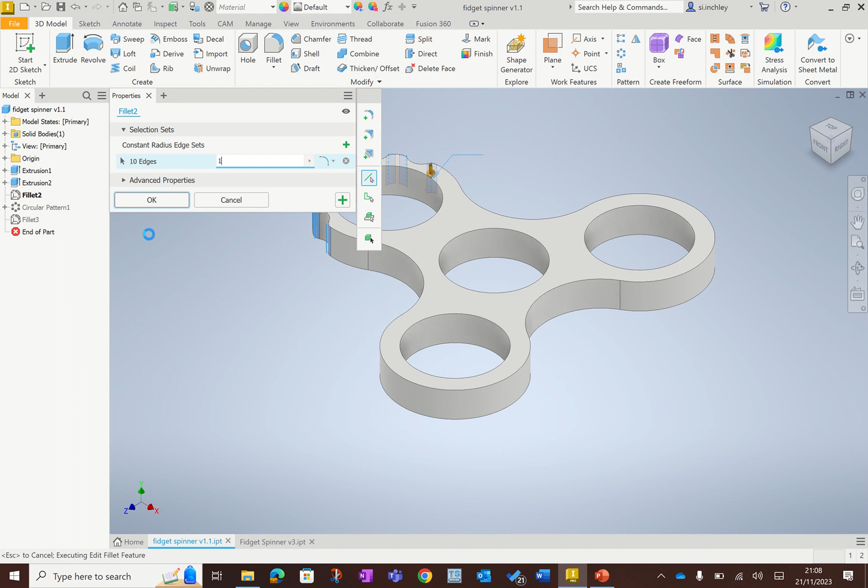Okay, now that you've got your fidget spinner kind of done, I actually decided I don't like this quite so rounded, so I'm going to come back up and double click on my fillets here, and change it from 2 millimeters to 1 millimeter. That makes that fillet slightly less on these inner parts, and then I'm going to double click on this fillet as well and change the top fillet to 1 as well.

That feels a bit more robust to me. Now I'm going to create a shape on the top here. So first, start a 2D sketch, and put it on the top.

Okay, now I want to take and use these circles that have previously been drawn. So I'm going to project the geometry of the previous circle onto this sketch by clicking on that circle and clicking on that circle.

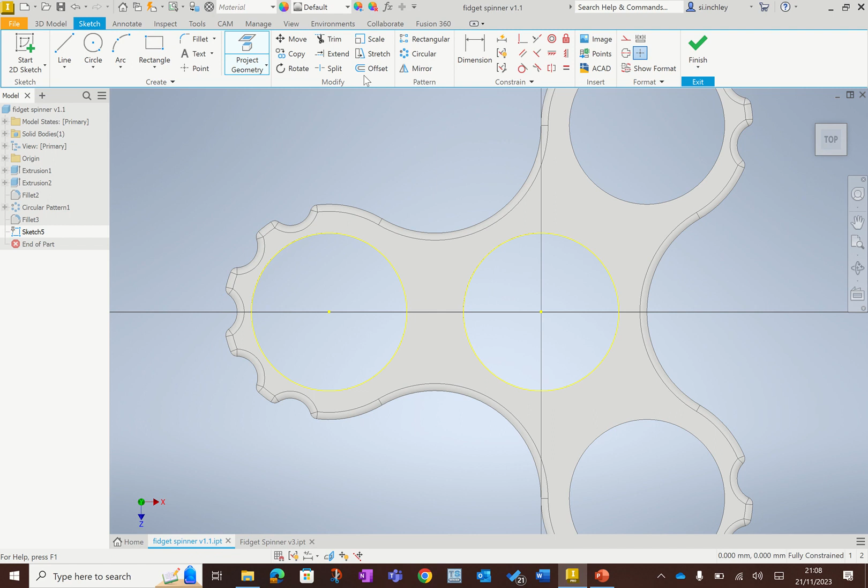Next, I want to offset this circle by clicking the offset button, coming over to this circle and just coming out and tapping in 2 before clicking again, and that's now drawn a kind of offset. That's as close as I want to get to that circle with cutting some things out.

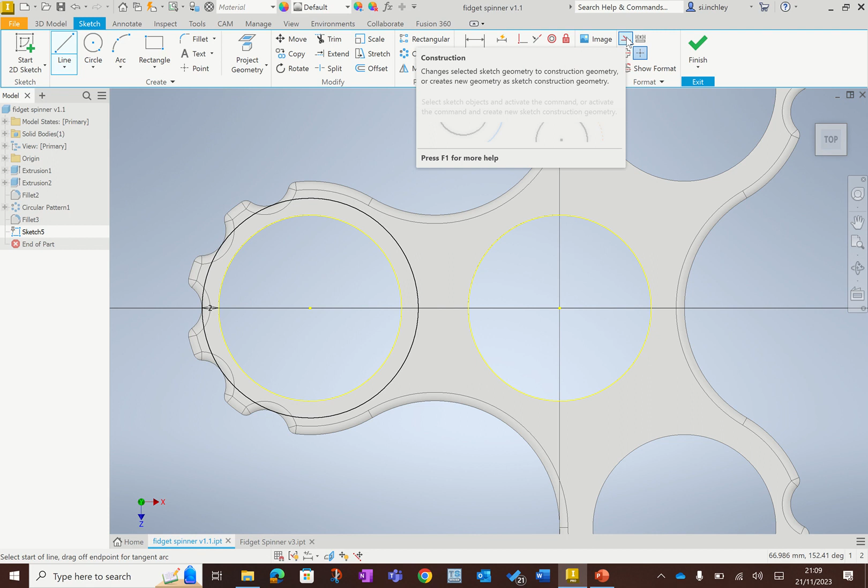So I've drawn that now, and next I want to draw myself a circle here, but before that I want you to click on the line tool and come up and click on this button called construction. Now from the center of this circle, click once and come over and draw a line to the center of this circle. That's now drawn what you can see as a dotted line.

It's still drawing lines, so I'm going to press escape to get out of the tool, and you'll see a dotted line there, which is helpful as a marker line, which you'll see why we want in a minute. Importantly, you must undo this construction button before we go any further.

That's now undone, and we can come and click on our circle tool. I want to draw a circle here from the center. Now let's say I just accidentally miss this line and click it here. You'll see how to fix that in a minute.

I'm going to come out and set that to 22 millimeters. Now I've drawn my circle. Here's the center of the original circle. I want you to come out this way.

We're going to offset that circle a little bit. So now I've come out a little bit, and we want to put that circle onto that line because we missed it. So I'm going to use this coincident constraint here, and with that highlighted, click on that central circle and then click on this line. That's shoved the circle onto that line.

I'm now going to come up and dimension between the center of that circle and the center of the original bearing circle, and click that to about 3 millimeters. Now that isn't quite enough of a scoop there for me, so I'm going to bring that up to maybe the same diameter of this circle here, which was 22 plus another 2.

So double click on that one. Oh, it's clicked the line instead. Can you see how it's clicked the line? So escape, and let's zoom in and double click on that. There we go. Let's go to 24 and see how that looks. That feels quite nice to me.

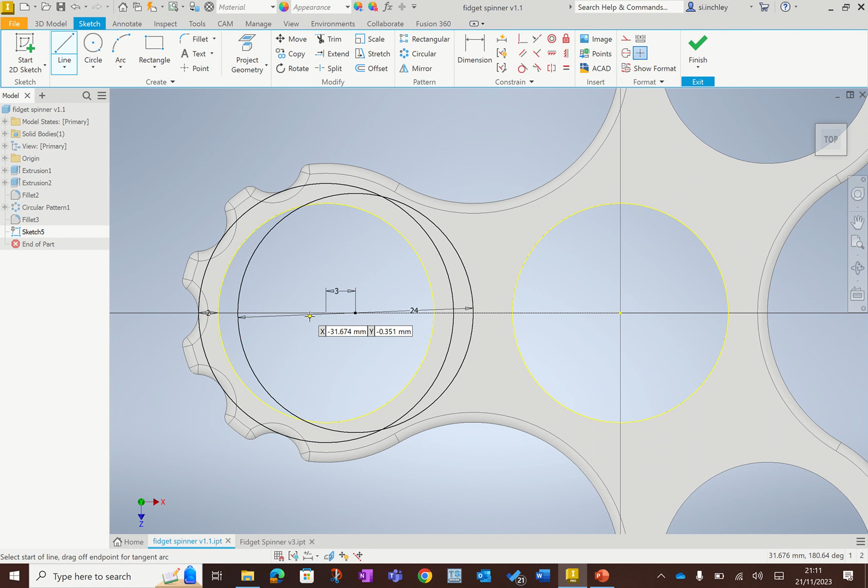Now, so we've got ourselves a kind of crescent moon shape. I'm now going to come up and click on my line tool, and let's have a little look. From the center of the bearing circle, not the one we've just drawn, but the bearing circle here, we're going to click on that line, and we're going to come up and hover over here.

Now, it's quite hard to get onto this line because it keeps snapping onto here, so just come up far enough so that you can click on that line there, and do the same thing from the center of a bearing circle to the outside of the furthest along circle, and click two lines. Now let's come off of there.

Now you can click on the dimension button, click on this line. It thinks you want to dimension it until you click on the central line as well, and it realizes you're doing angles, and you can come out here and click out here once, and let's put that at 4. Do the same with this line: click once on this line with that dimension tool highlighted, then click on the central line, then come back out to here and click once and click on 4.

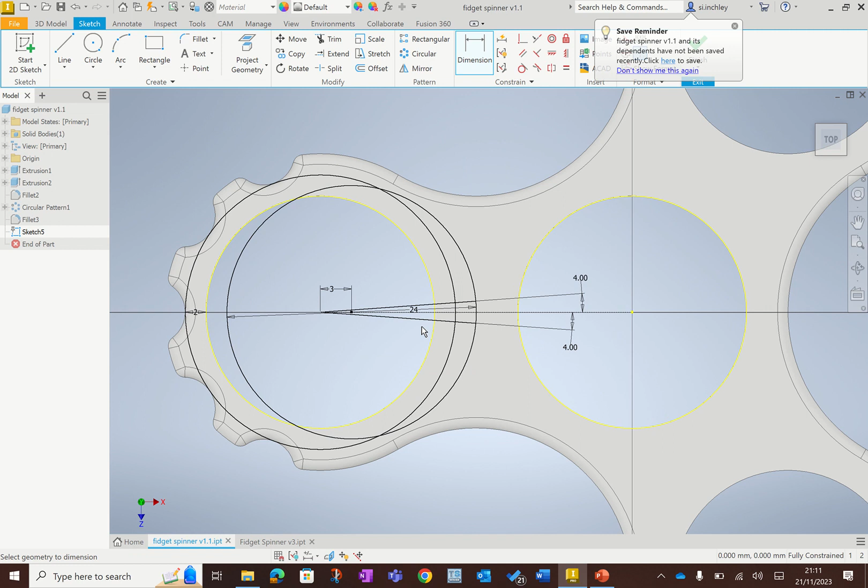That's now given me the right angle that I want to be working with. And you can now see that's why we drew that line originally, it's a marker line.

Okay, now I'm going to come up and circular pattern those two lines. So, circular pattern tool, for geometry highlighted, click on that line, come up to the axis, click on the bearing circle, change it to 8. Change the direction, it's going up at the moment, I've clicked the bottom line so I want it to be going down, so I'm going to change this button, the direction, by clicking on this button. That's now, as you can see, going down. And I'm going to change the angle not to 360, but to just 60. Okay, now you can see I've got all those lines coming down like that. I'm going to click OK.

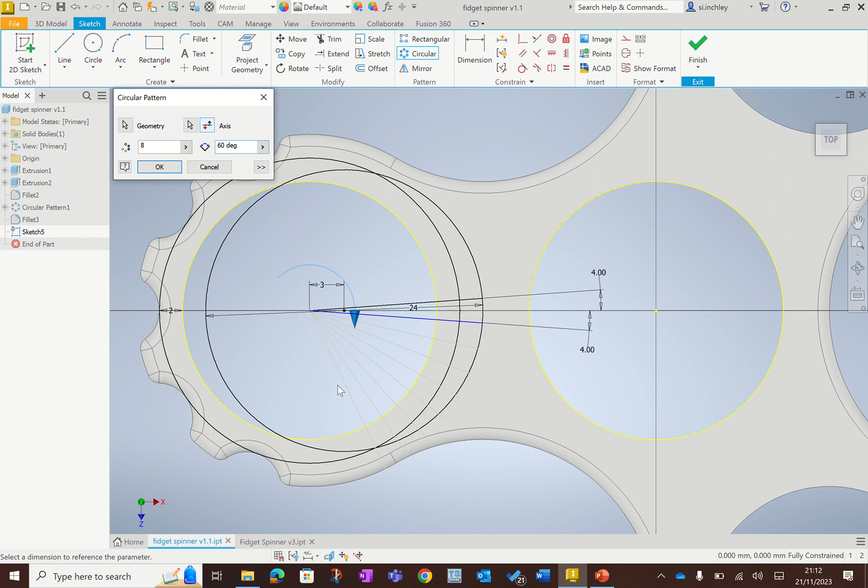I want to do the same thing going the other way, so I'm going to click once again on the circular pattern tool. I'm going to select this top line this time, like that, and then click on the axis button, select this bearing line. It does appear to be going the right direction this time, going up. I'm going to change that to 8 lines, and change the angle to 60. Okay, there we go, it's now drawn that nicely for me. You can see that kind of shape.

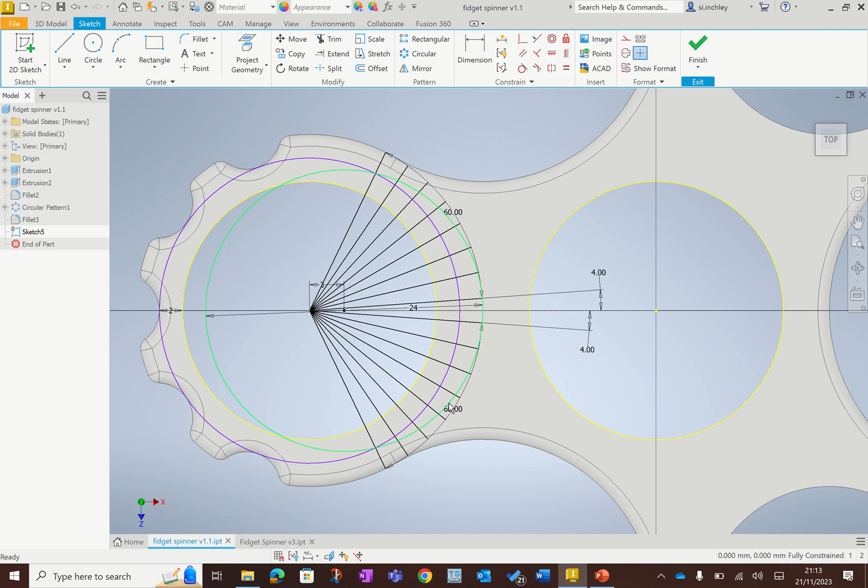Now I want to cut out some of these shapes here. So I'm going to finish my sketch now and see if I can cut out some of those shapes. So we're going to go to the extrude button. You already know what to do on this extrude button, so let's have a look at what we can do.

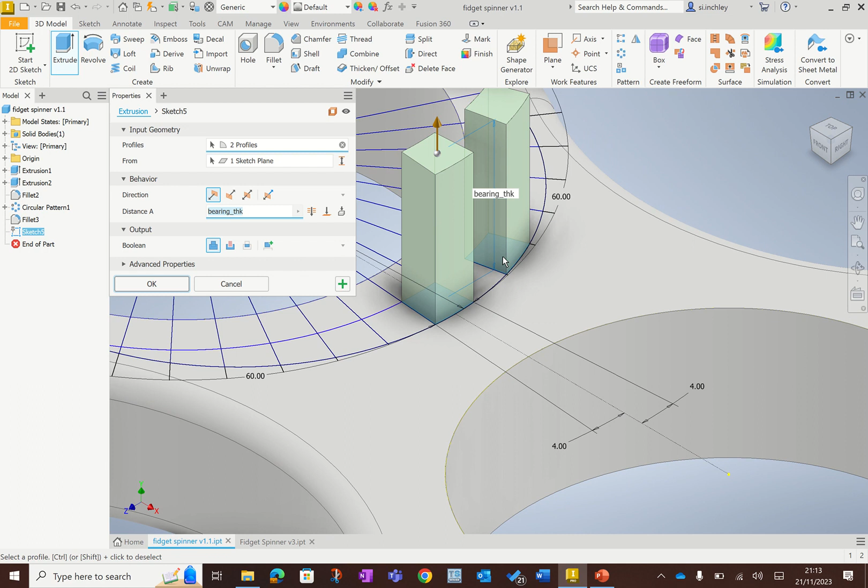You can see this is why I have this shape here, around the central line. I didn't click onto the central line, but here we go. So I'm going to click that shape first. It's adding material at the moment, which we're eventually going to cut away, so you might have to rotate this around. Now you can see I don't want that one, I want every other one, that's what I'm going for here. That feels pretty good to me.

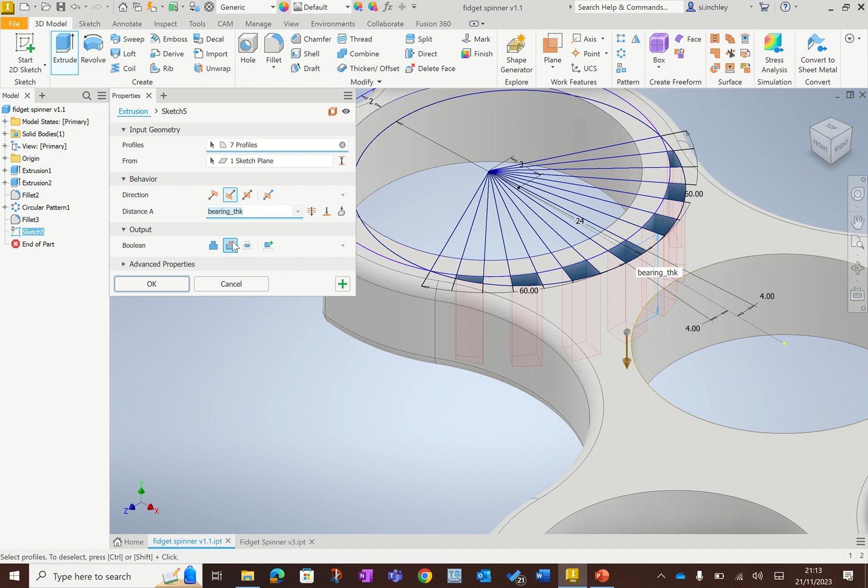So let's come around this side and do exactly the same thing: click on this shape, click on this shape, click on this shape. That feels good. Okay, so now I can press this cut button, and it's already using the bearing thickness. So I'm going to click OK, and that's given me a nice shape. You can play around with the different settings on there.

Once again, use the circular tool to highlight the feature, which was the Extrusion3, and then the rotational axis button to select this part here, change that to 3, and there you have that part which goes around all 3 areas.